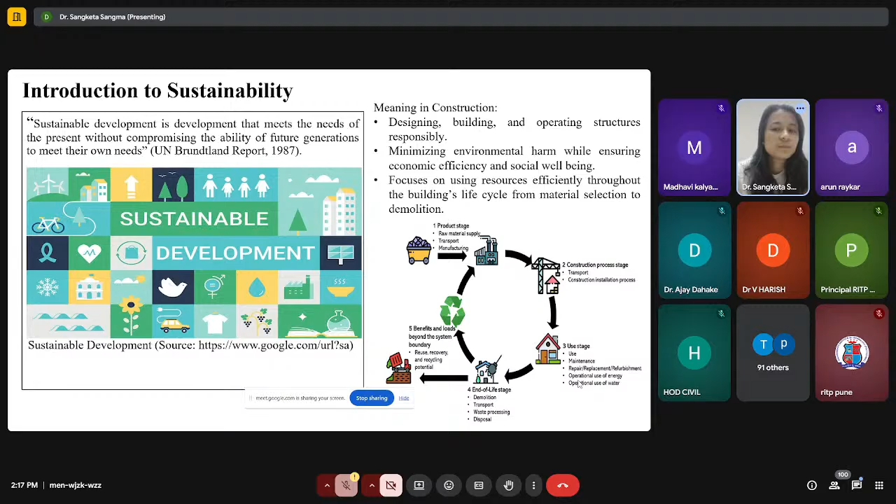As I said when I started about the sustainability definition, we need to balance between environment, social and economy. The same thing is applicable for our construction process also. So environment, social and economic are said to be the three pillars of sustainable construction, or sustainability. As we are dealing with the construction process, we can say these are the three pillars of sustainable construction.

So how does it become the three pillars, first we need to understand. First thing is environment. If we use natural resources from the environment, it will reduce the carbon footprint. So from natural material we can make construction more sustainable.

So once we use environment friendly material, what will happen? It will positively affect our health and comfort, and ensure our safety. So in that way, all these are correlated to each other. Once we use natural resources, it will affect our health, then ensure safety. Once all these things are assured, it will affect our economy also, as using sustainable material will be economical in the life cycle of the construction process. So that is the circle of sustainable development in construction - the three pillars of sustainable construction are environment, social and economic.

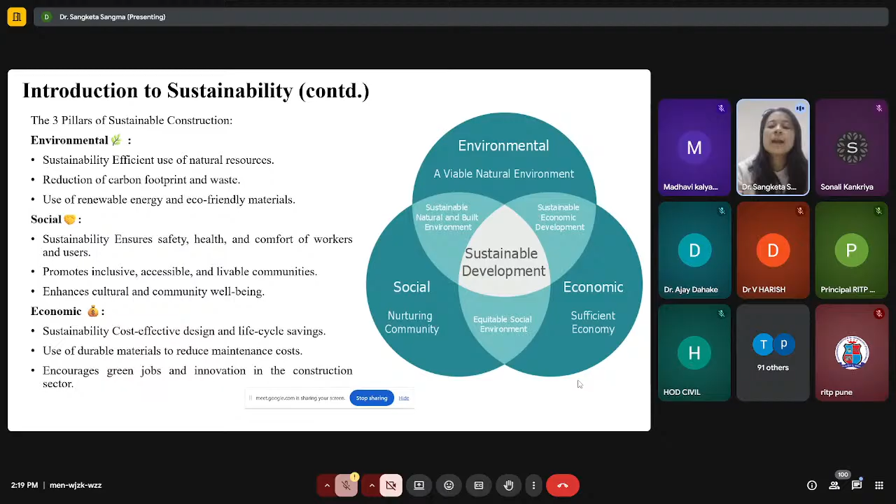Next, why do we need sustainability in case of construction, or in India also, why do we require it? Now we know the population in India is too high. Once the population is high, everyone requires their own home, or we need our dream home. Everyone is running behind that, and for that construction demand is also increasing day by day.

Once the construction demand is increasing, we require more material for the construction process - cement, steel, water, energy - so urgent need of efficient resource management is required. Now we know, being a civil engineer, how manufacturing steel affects our environment, or the cement, how it's affecting our environment. The manufacture of cement is affecting the environment, so we can say it will affect us negatively or directly or indirectly also.

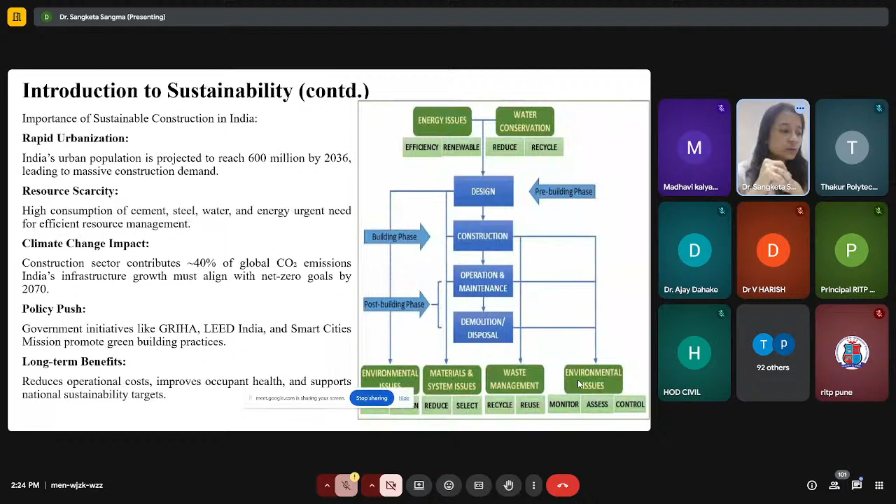Yes ma'am. Okay, once it's done, let us proceed with the core principles of sustainable design.

As we discussed, we need to make everything sustainable, but it will not start from day one. We should start slowly and go beyond that. For that, there are different principles, as I discussed, like different schemes. In those schemes, they use some principles and design policies. There are core principles of sustainable design which we need to focus on from the beginning to the demolition of that particular structure - meaning the entire lifespan we need to take care of that building or structure, in order to minimize the environmental bad effect and increase its efficiency.

There are four phases: designing, construction, operation, and reuse or demolition. In designing, we have to think from the beginning - whenever we are designing any structure, we should select material in a way that it is eco-friendly. Once we use eco-friendly material and recycle it, it will be useful for us in the future also.

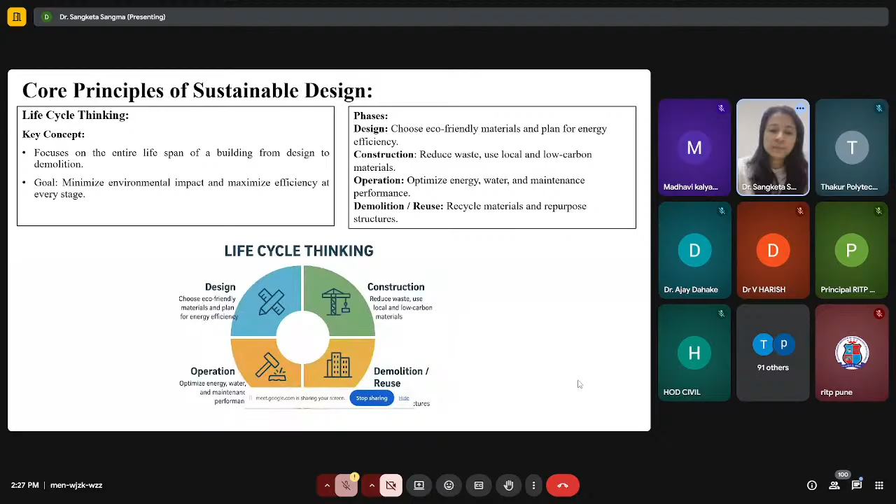If we elaborate on these four principles, that is another big chapter by itself, but we should know the basic thing first - the core principles: design, construction, operation, and reuse and demolition. That is the core principle of sustainable design. Now that we've discussed the core principles, there are different methods and designing processes that will follow.

So one of the processes is passive design principle. Passive design principle is nothing but there are some core elements that we should follow. If I say it simply, whenever we are making our house, we are following Vastu. What is Vastu? That is the basic design principle. There, we are checking that the orientation is proper, the ventilation, daylight and shading - all these things we follow and we make accordingly. So these are the core elements of passive design principle.

So the definition of passive design principle is designing buildings that naturally maintain thermal comfort, reducing the need for active energy systems. So what are these active energy sources? We will see the core elements.

First is orientation. We should make the building or our construction or our greenhouse in such a way that we will get natural light directly, or it will help us so that we will not use artificial light at least during daytime.

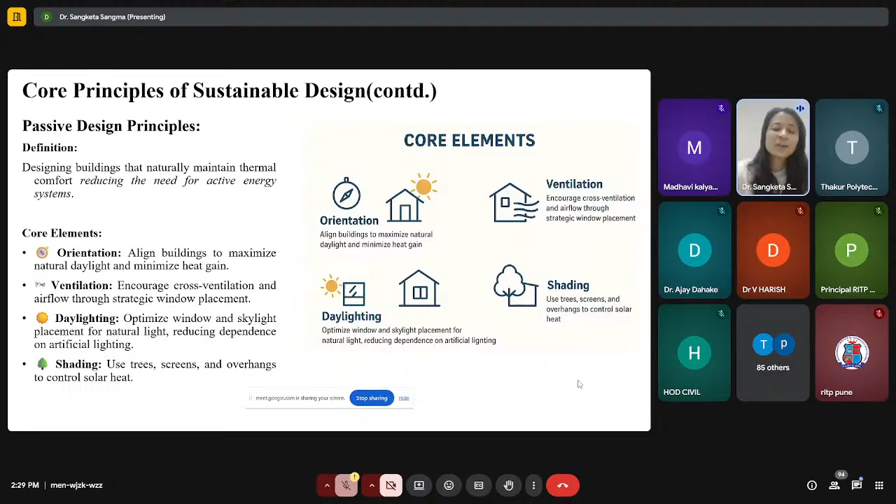The next is, who is giving certification for the core principle? See, these are the certifications that are given, they are controlling all these things. Like this, Indian Green Building Council (IGBC) - they are also certifying this core sustainable principle.

Meaning they are focusing on particular things, like energy, water, material, indoor air quality of the commercial or residential houses. According to that, the whole society, you can say, according to that, they are giving the rating system.

And another thing is GRIHA is there. GRIHA is also giving us the rating system, where we need to follow every principle, core principle. If we follow all the principles, then we will get the 5 star for that particular structure or building.

And another one, the most popular one nowadays, is LEED, which is giving certification. It is very popular. Their certification is based on, like they are giving silver certified building, then gold certified, then platinum certified, based on how you are using sustainable resources, and after the construction of the building, how you are managing that one. That also comes under this LEED.

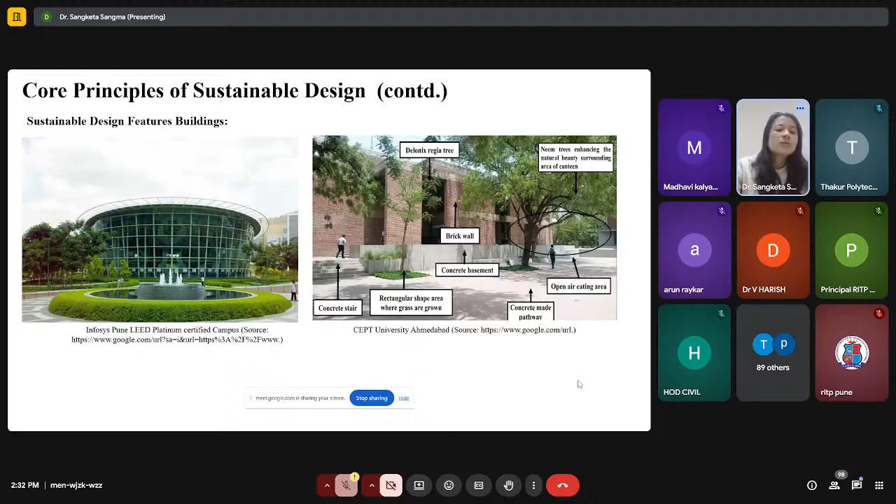There are many others, but I took these two because they are the oldest ones that got the certification. Next is energy efficiency and low carbon design, building envelope optimization. So, the element we understand that we need for our particular building certification - for that, we need energy efficient or low carbon design building processes.

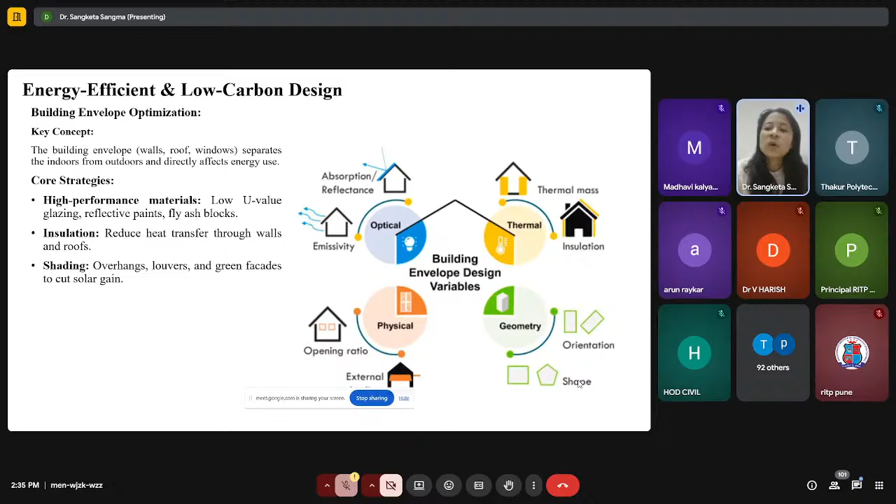Next, under energy efficiency and low carbon design, there are different things we can use: solar panel, passive cooling, and solar thermal system, which we can implement in our institute.

Like the solar thermal system or solar water heating system is also there in our college, where all the hostels have that facility. They get solar water heating, getting hot water every morning in both hostels in our college.

Then the solar panel is also there. If we use a solar panel, it will reduce the electricity cost for us, and it will be eco-friendly too. Nowadays, everywhere we are trying to implement solar panels on rooftops. In many societies too, they are trying to implement this.

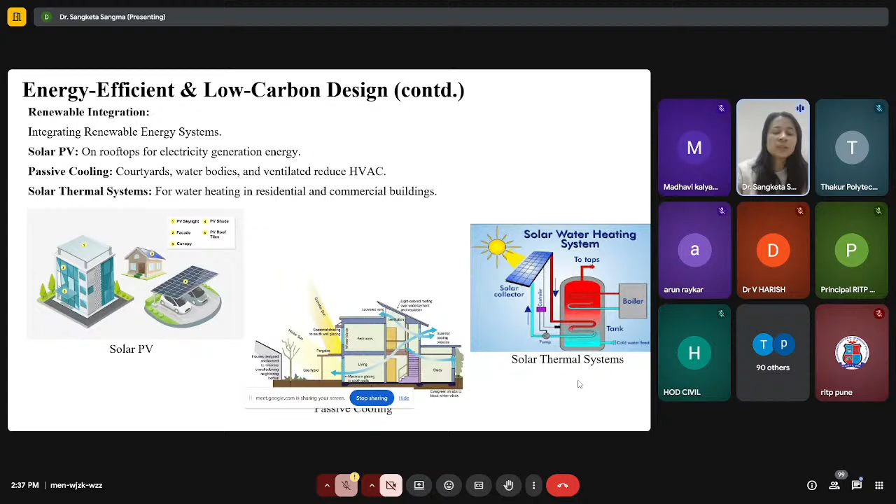Passive cooling means how we make the orientation of a particular structure, which will give us basic cooling. So we use proper ventilation in that structure, or the building is designed accordingly. So that is the third thing, renewable energy system. Actually there are many, but these are the most popular ones, so I am discussing only those.

So, one thing is that sustainable and recycled materials.

As we need to do some sustainability, we need to recycle things, as discussed earlier. In the whole process, after demolition of a structure, we include the reuse or recycle of materials, and that material we use again for construction.

If you remember the second slide of this PPT, there are different materials, including recycled materials.

In sustainable rating systems, fly ash and GGBS have 5 star ratings. Why? Because using fly ash and GGBS improves the durability of concrete and reduces its permeability, so we get more benefit. These materials are industrial byproducts, which is a recycled material.

There are other materials too, like bamboo or recycled aggregate we can use.

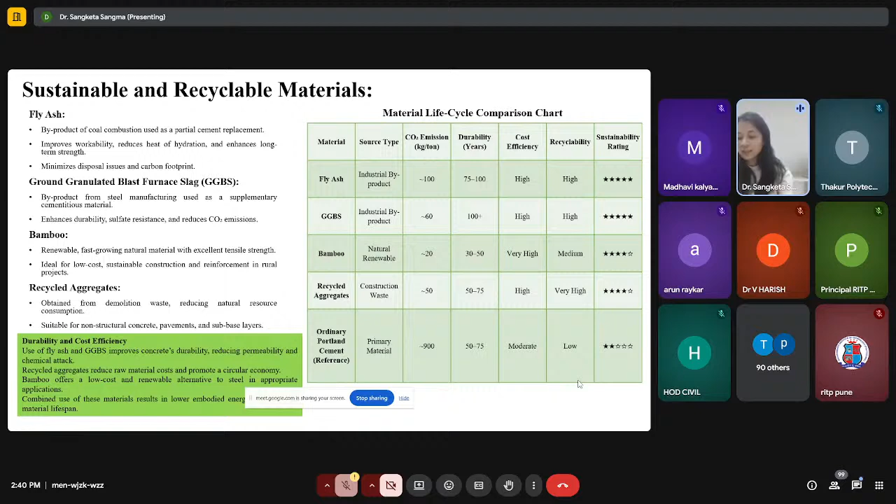Another thing to understand - I have a video for all of you to understand this properly, why it is required and why we need to do this recycling.

everyone. Welcome back to Civilex.

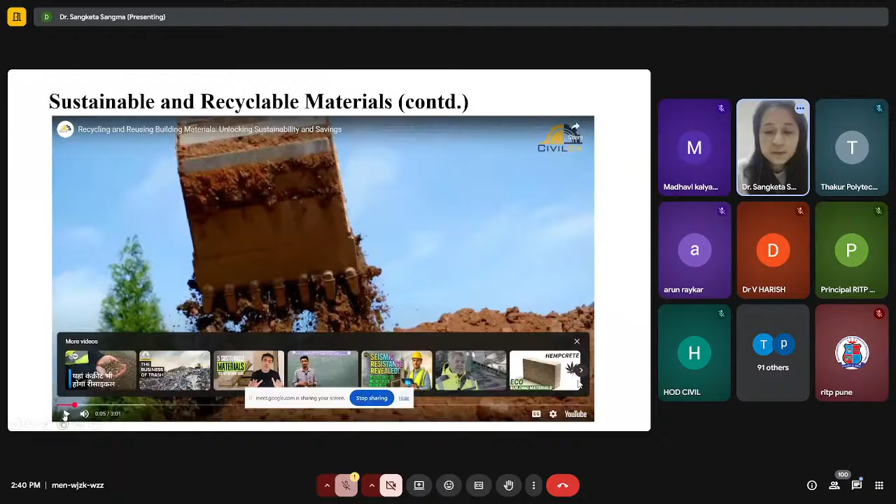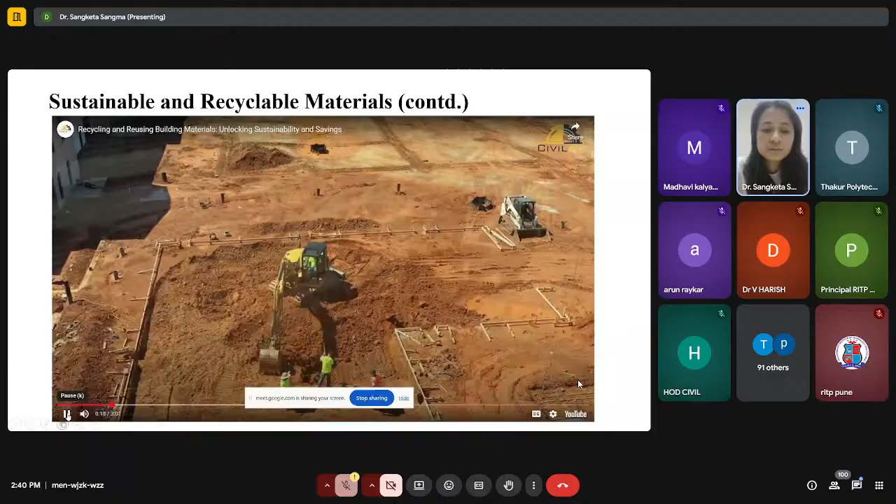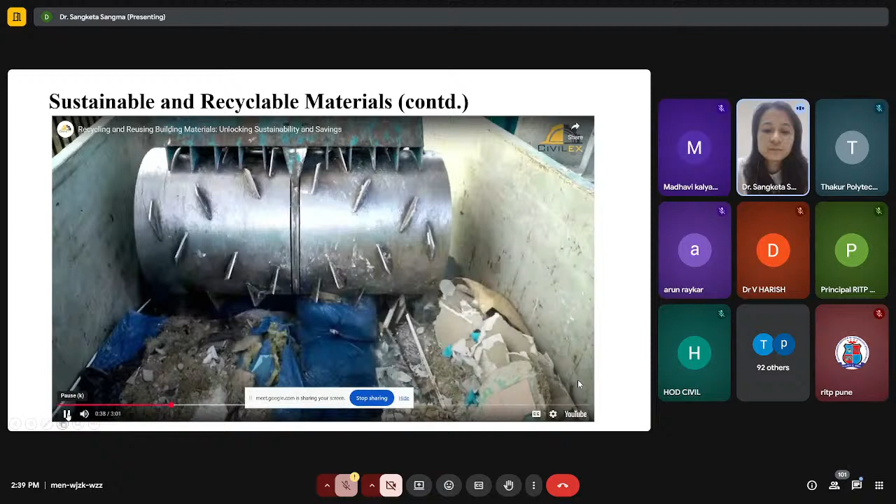Today we're diving into a topic that's not just environmentally friendly but can also save you money in your construction projects - recycling and reusing building materials. Let's get started. Before we explore the how, let's understand the why. Recycling and reusing building materials are crucial for several reasons. First, it reduces construction waste, which is a major contributor to landfills. Landfills are not only unsightly but also harmful to the environment. By recycling and reusing, we can significantly reduce our impact.

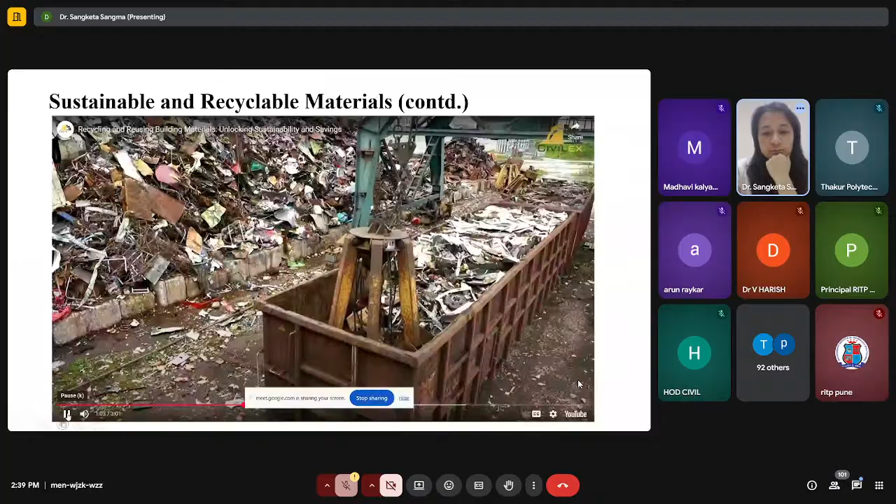So what can we recycle? Here are some commonly recycled building materials. Concrete is a big one - it can be crushed and used as aggregate in new concrete projects. Metals like steel and aluminum are highly recyclable; they can be melted down and used to create new products. Wood can often be reclaimed from old buildings, refurbished, and reused in new construction.

But recycling isn't the only option. Let's explore creative ways to reuse building materials. For instance, reclaimed wood can be turned into stunning furniture pieces. Bricks from demolished buildings can find new life as garden pathways or walls. Recycled glass can be transformed into beautiful countertops.

So why should you consider recycling and reusing in your construction projects? First, it saves money - recycled and reused materials are often more affordable than new ones. Second, it's sustainable and eco-friendly, reducing the demand for virgin resources. Third, it can help you achieve green building certifications, which are becoming increasingly important.

Ready to get started? Here are some tips for recycling and reusing building materials. One, sort and separate materials on your construction site - this makes recycling easier. Two, visit salvage yards and second-hand stores to find reclaimed materials. Three, properly clean and refurbish materials to ensure they're safe and functional.

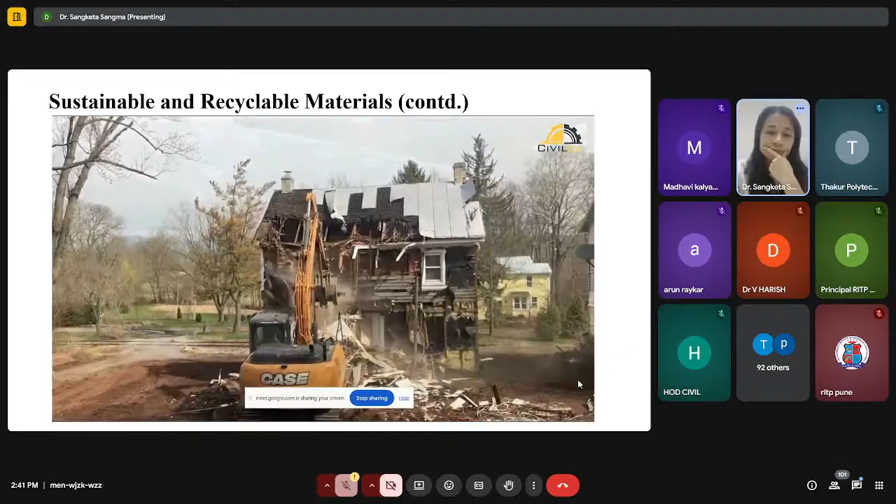So there you have it, the wonderful world of recycling and reusing building materials. It's not just about going green, it's about saving green too. By making smart choices, we can reduce waste, lower costs, and contribute to a more sustainable future. If you found this video informative, don't forget to hit...

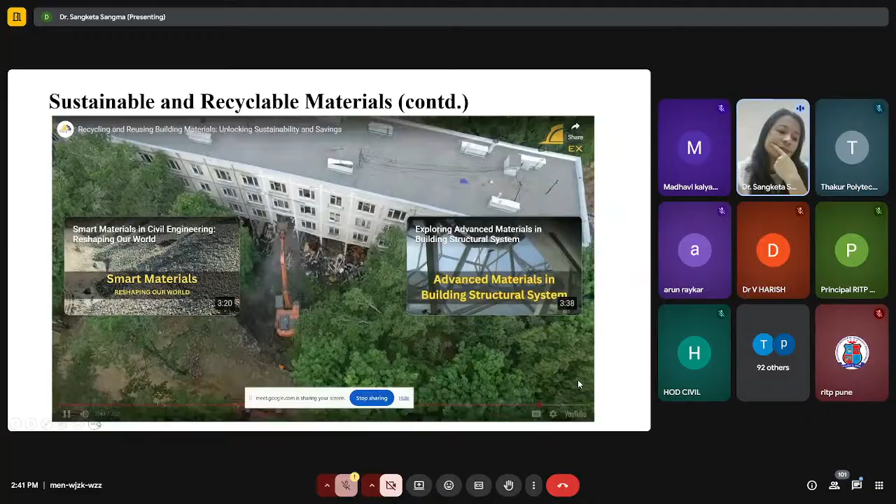From the video, what you understand is that recycling and reuse material, we need to use it to make the structure sustainable. But as I said, there's an issue, which is sorting. So sorting is one thing you can work on, how to make it an easier way to sort this demolished material, so it will not affect our environment, and we will get all the recycled material and reuse it.

Nowadays in many societies they are using solar panels, water heating, and small wind turbines in the building. If all of you are from Maharashtra, you will feel proud that in Pimpri Chinchwad they are using this method in many societies. They are using solar panels and water heating processes for their society, and they are doing cost cutting for their particular society.

Next, one of the beautiful examples, as I said, is Infosys, the Pune campus of Infosys. What they are doing is they are LEED certified, platinum certified. They have buildings there, so you can see how they are using and managing it in this particular video.

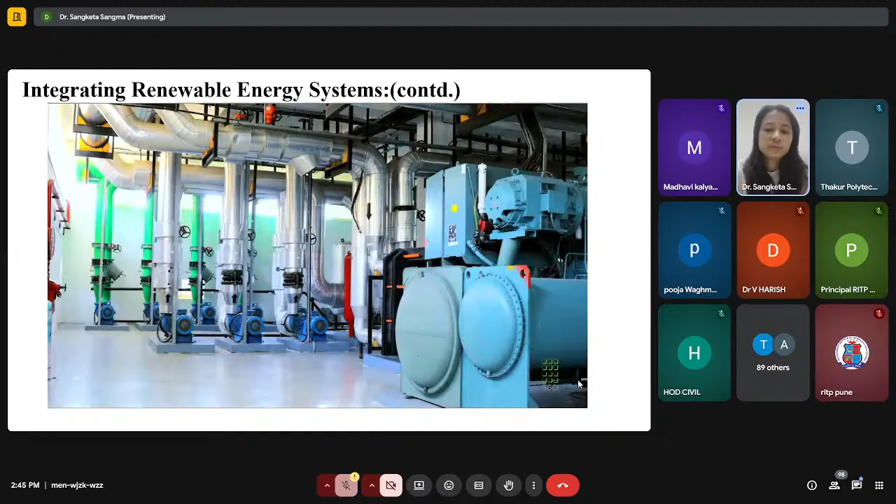Energy efficiency was optimized with efficient HVAC systems, LED lighting, and a 1.3 megawatt rooftop solar array. In a campus, we've achieved 49% reduction in our energy consumption. We have an energy performance index for two of our buildings at 76 and 67. These two buildings are the largest HVAC experiments in the world. 70% of our energy that we source is green power. Our retrofit costs are 21% lower than the standard costs in the industry.

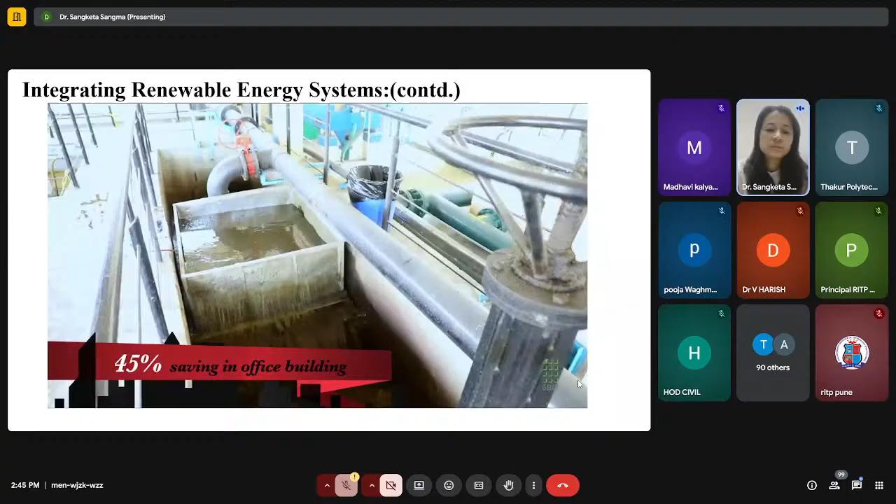Rainwater harvesting is practiced throughout the campus, which features 42 recharge wells, 3 reservoirs, and a 65 million liter capacity. Efficient fixtures and dual flush toilets also contribute to conservation, as does an on-campus sewage treatment plant. Design optimization for water gave us 45% savings in office buildings, 43% savings in food courts, and 33% savings in guest houses. We do very comprehensive smart metering, connected back to our building management systems.

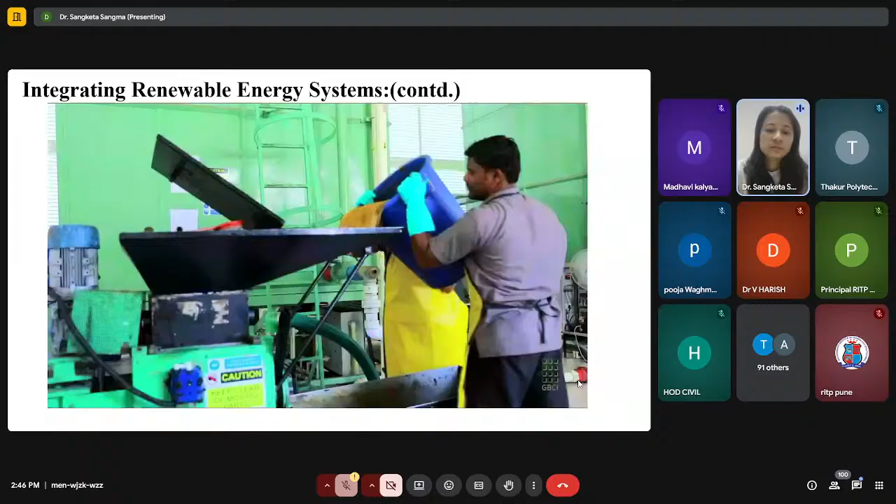All waste is segregated at source. Organic waste is converted into fuel at a 2-ton biogas plant. Dried leaves are used to make vermicompost. More than 90% of the waste has been diverted from landfills and reused in a responsible way.

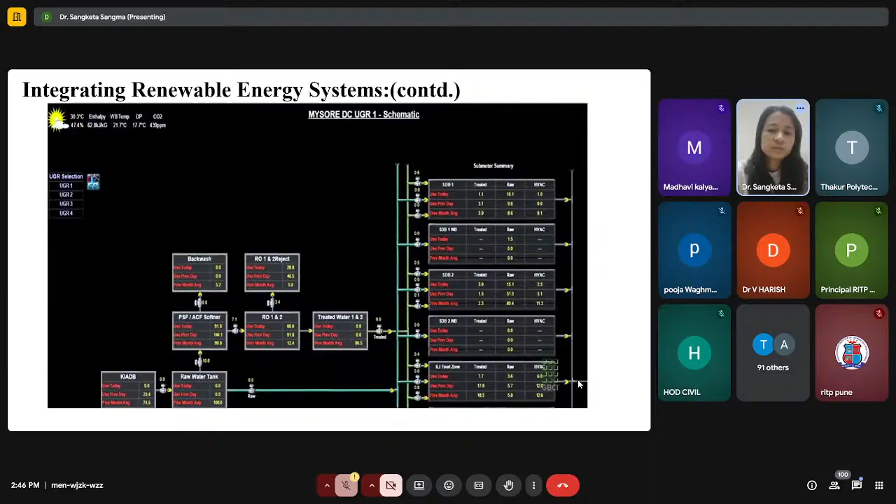Infosys believes in providing its employees a healthy and comfortable work environment. Carbon dioxide sensors permeate the campus, and frequent indoor air quality audits are conducted to ensure all systems are performing properly. For overall quality assurance, the performance of every building on the 113-acre complex is monitored and managed by one central command system. There's also a very comprehensive advanced help desk where an employee can log in and raise a complaint if he has issues in comfort.

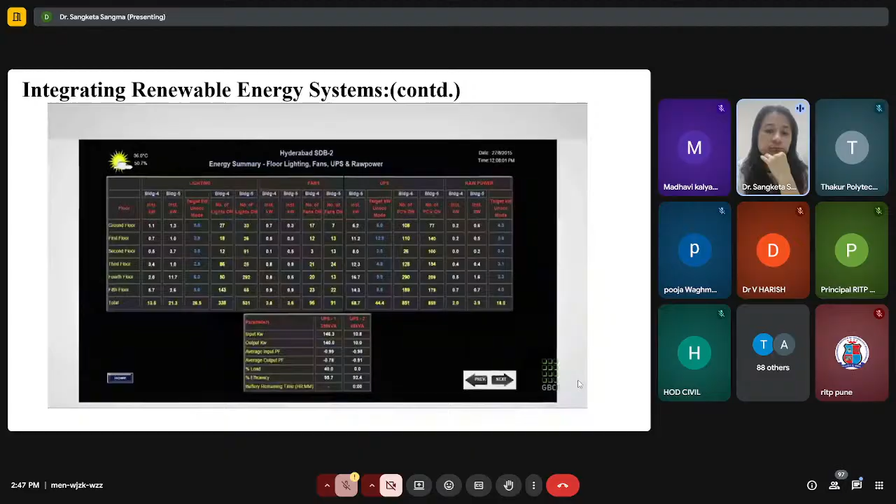LEED is a very thoughtfully designed framework for evaluating a building environment that is green, safe, and sustainable. We realize that LEED gives us a holistic view of what needs to be done to give occupants an environment to deliver their best potential. As an environmentally and socially aware multinational, Infosys is committed to sustainability's triple bottom line: people, planet, and profit. And LEED, the only globally recognized rating system for green building, is working with Infosys every step of the way.

Infosys strives to deliver value and innovation to build a sustainable future for ourselves, for our clients, and for the society we live in. So all our projects are designed keeping LEED Platinum as the ultimate goal.

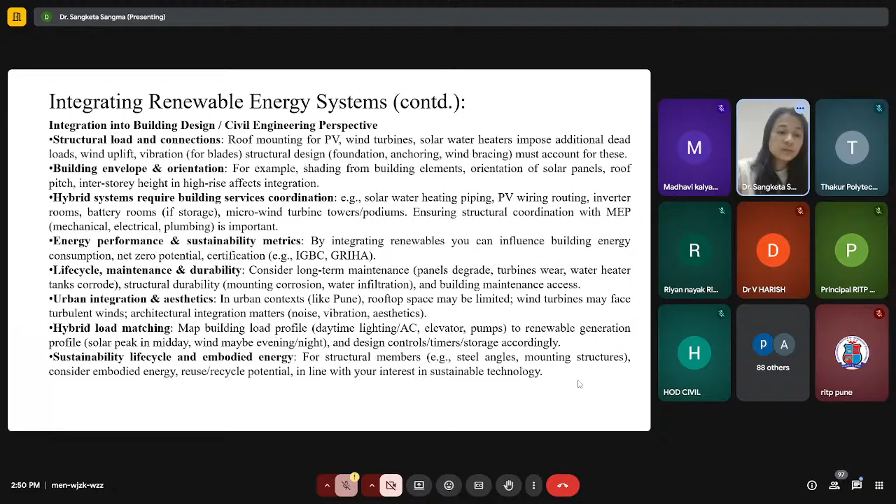So another part is water and wastewater management. If you think about what we've been considering since our school days, this includes rainwater harvesting, grey water treatment, and construction material use.

Rainwater harvesting is something we can implement in our particular society and in our colleges too. Being civil engineers or being in a civil branch, we can implement this all over the campus if we understand the process of this particular method.

I prepared an animated video on this topic. If you understand it through an animated video, it will be easier for all of us to see how rainwater harvesting works. So you can check the process here.

Rainwater harvesting is the collection and storage of rainwater rather than allowing it to run off. There are two methods by which rainwater harvesting can be done. The first method is direct collection and storage of rainwater from rooftops and reservoirs.

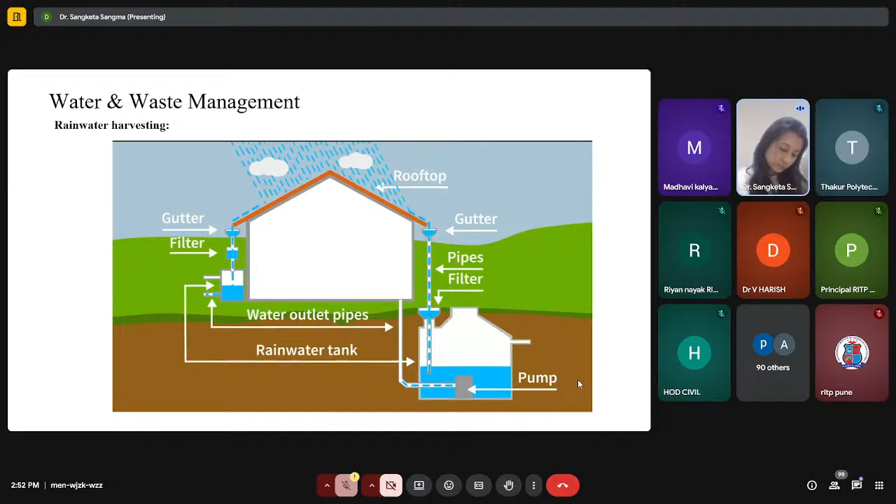Rainwater can also be directly collected using dams, which are built across streams, rivers, or canals to stop or restrict the flow of water, thus forming reservoirs.

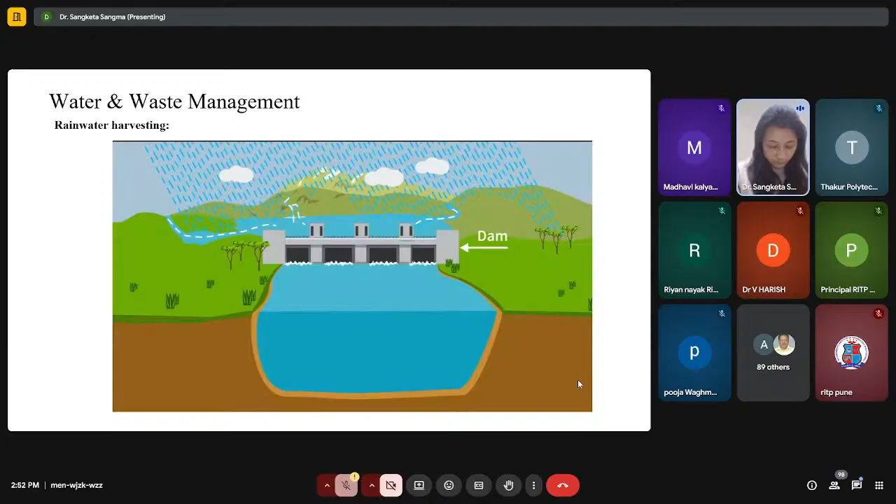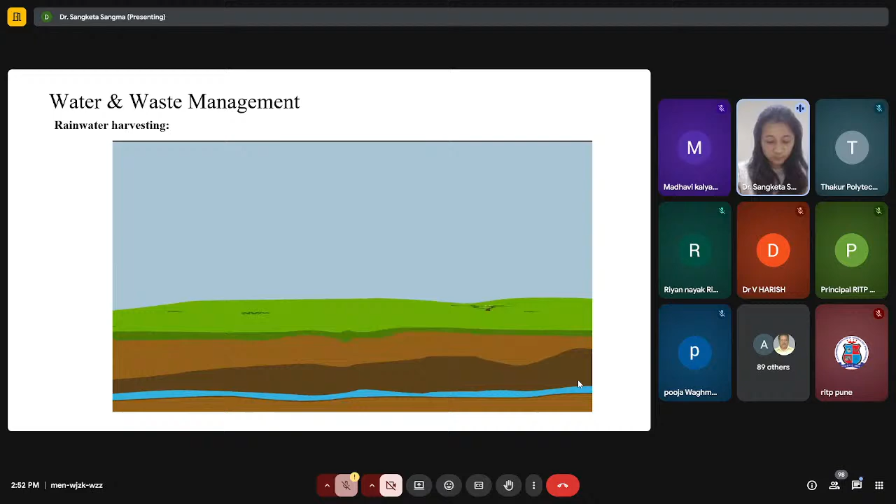The second method of rainwater harvesting is the artificial recharge of rainwater to the underground to improve the storage of groundwater. To store water using this method, pits and wells are dug deep into the ground, and rainwater is recharged and injected into underground aquifers through pits and wells.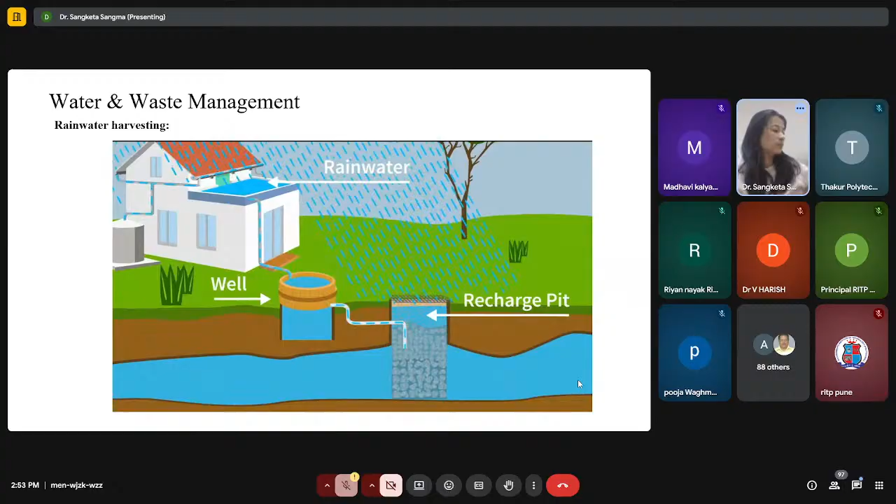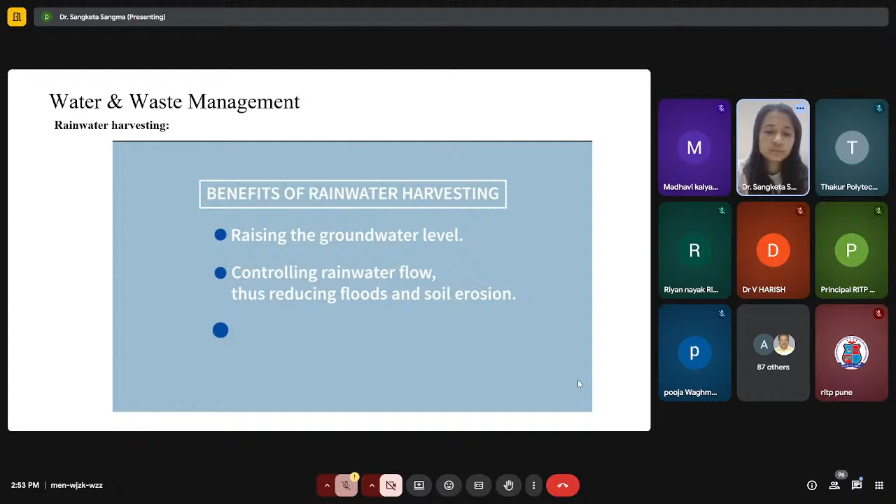There are several benefits to rainwater harvesting, such as raising the groundwater level, controlling rainwater flow, thus reducing floods and soil erosion, and preventing rainwater pollution. However, the most important benefit is probably meeting water demands in dry seasons.

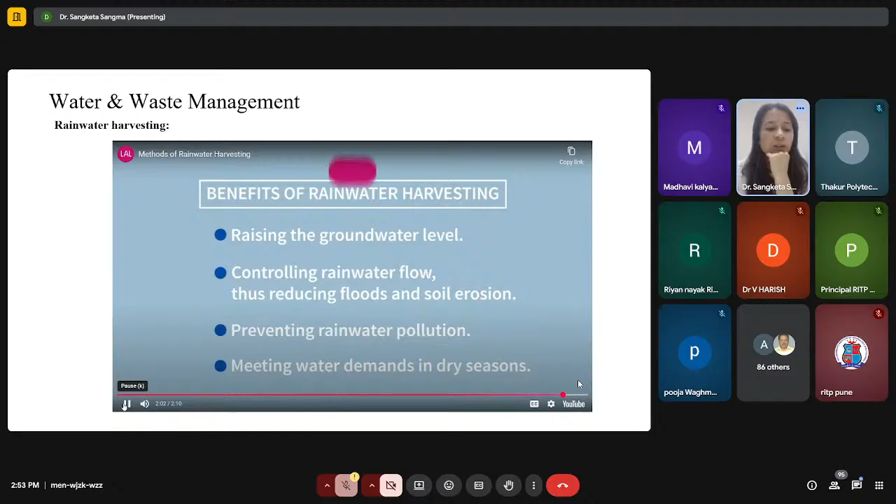Now let us check for grey water also - grey water treatment.

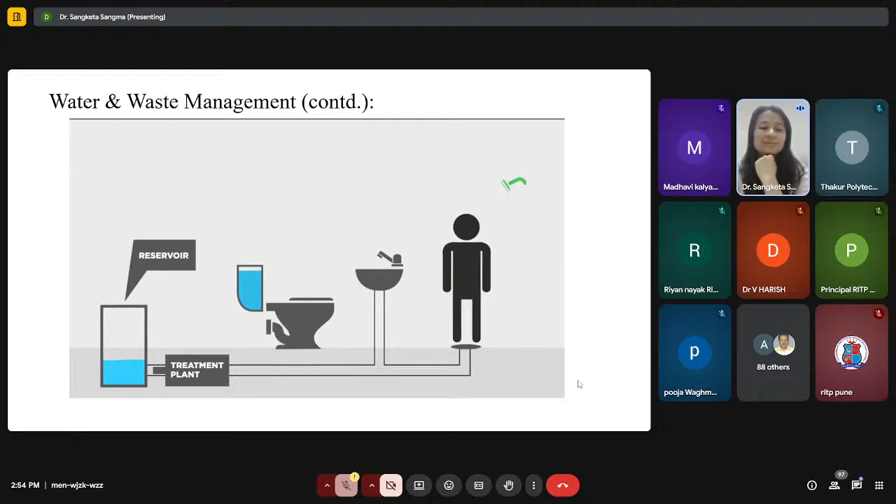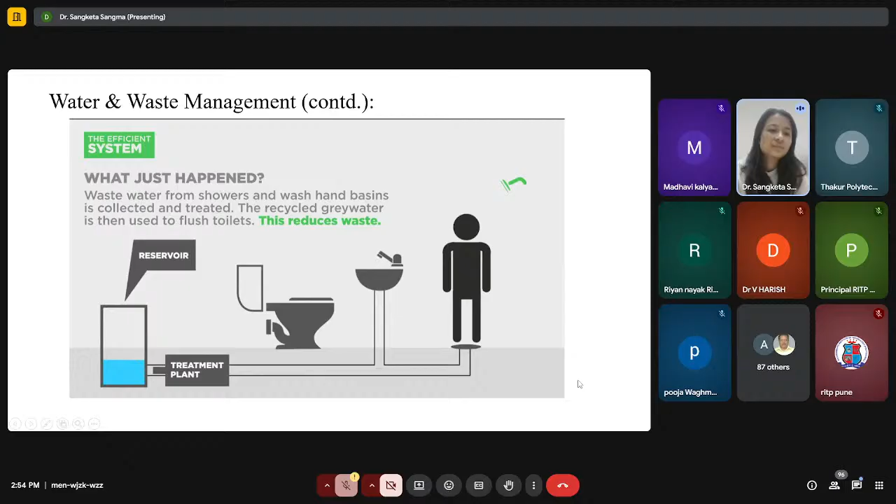Okay, if you saw the video, can anyone tell me what you understand from that one? That for the grey water treatment... anyone? Am I audible? Yes ma'am, so can you understand? Because what I understand is that nowadays students are very much interested, if we show them some video they're getting the thing easily nowadays.

So from the grey water treatment, what you understand from that, it's a very easy process here, that how we can save and how we can manage the waste. So can anyone tell me what you understand actually and we can implement in our campus, or maybe in our society or in our houses. It is possible for us to do the same thing.

Anyone saw that video? Okay, fine, it's an online one, so wait.

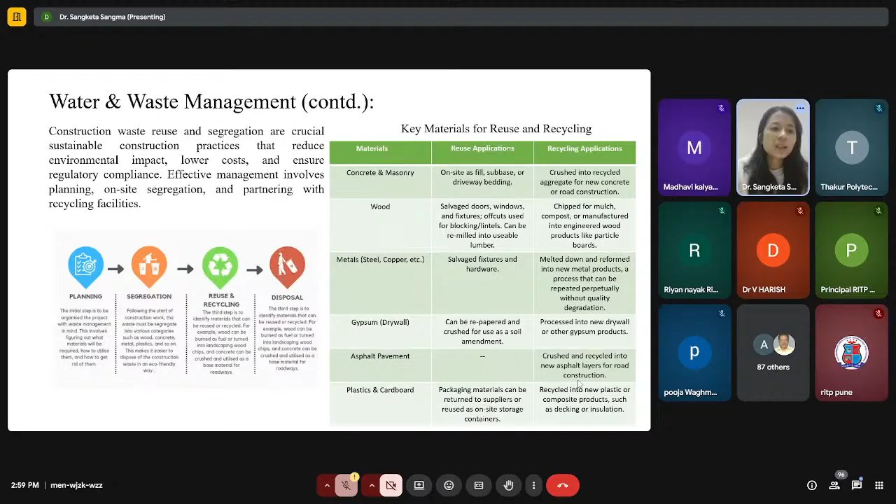Then one thing is, I discussed today many things, so from that, according to me, I understand five things. If you agree with me, just say the things. If you disagree with me, also please discuss according to that.

First thing, what I understand from the whole is sustainable design and construction. We need smart planning and life cycle thinking. We require it properly. Another one is energy efficiency and low carbon strategies, like we need to use material in a way that has low energy carbon emissions.

Then eco-friendly material, maybe some recycled material, and the renewable energy we need to use, that is solar panel and hybrid system also. And the water and waste management, how we can do it, just now we saw reduce, reuse and recycle. So that is the five pillars what I understand from this particular construct.

For the construction we require to make it more sustainable. If you want to include anything, I'll be very much happy if you include that, and whatever according to your understanding, if you want to include or reduce something also from there.